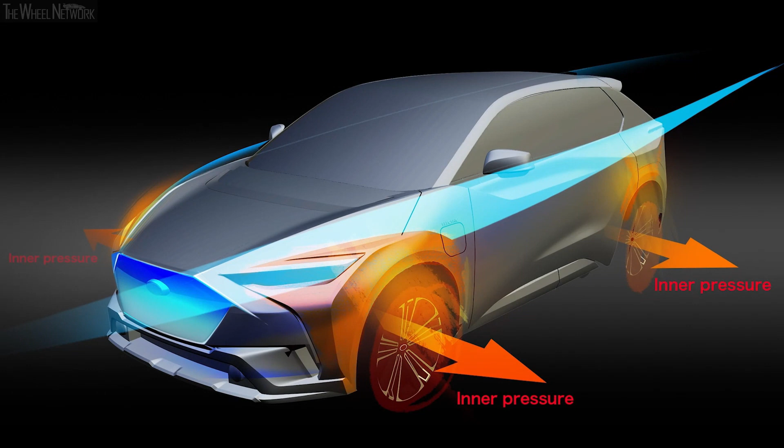These aerodynamic features all optimize airflow. They reduce disturbance and noise. When you're sitting in a car that runs without an engine, it tends to be quiet, and the last thing you want is wind noise spoiling that quietness. So these aren't simply nice-to-have design elements, they all perform very specific functions.

Inside the car, designers created an open, relaxing, uncluttered space. Meters have been raised for easy visibility, and the instrument panel has been lowered for openness. The center console connects naturally with the 12.3-inch center display. They've minimized the number of switches and tried to keep things as intuitive as possible. The Solterra comes equipped with Harman Kardon premium audio, exclusive to the Subaru version. There are other details about the interior we'll give you later. Above your head, there's a large glass roof that accentuates that feeling of spaciousness.

There's plenty of space to sit in the rear. There's no cumbersome tunnel in the middle, so there's more space for your feet and legs. We'll have a quick look at the trunk later - it's got 464 litres of loading capacity, with space for 3 large suitcases, 4 golf bags, or similarly large items. You've got hooks and rings to make sure your luggage doesn't fly around when you drive. If you've put down the rear seats, you can slide in a bike or one of those long heavy boxes from that famous furniture shop.

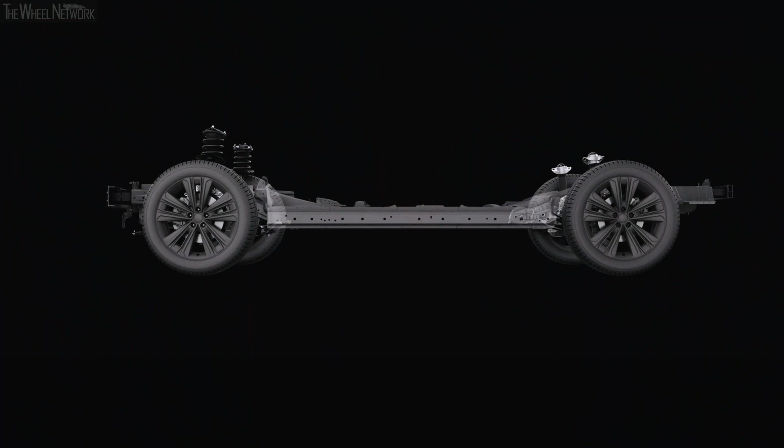Now, electrifying a Subaru to full electric means we had to address other new safety areas. Adding batteries to a car adds weight, and the heavier the car, the more damage it can cause to the vehicle it collides with. That's pure physics. Engineers factored this in when creating the Subaru e-platform that houses and protects the electric equipment and the electric powertrain.

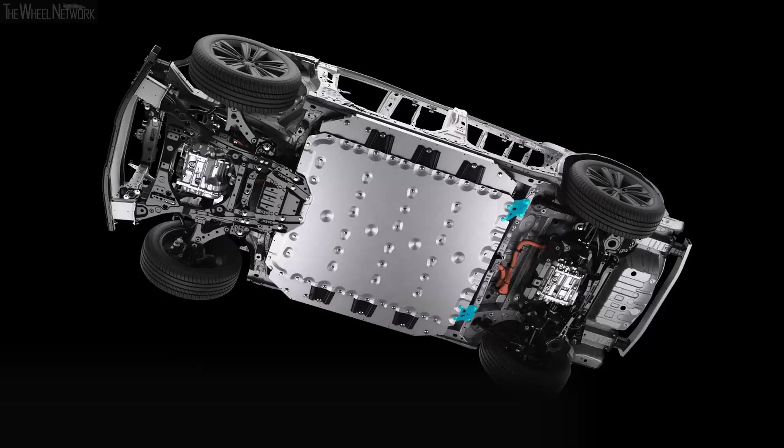They engineered it in a way that not only allows batteries to be stored safely in the underfloor, they utilize the batteries to make the framework stiffer and stronger. As a result, the Solterra rides on a platform that is 1.2 times stiffer and more rigid than the platform used on our petrol and hybrid SUVs. It had to, because the car's heavier.

In the event of a collision, the impact energy is channeled via a multi-load path that deflects it from the area where the electric components are located. Occupants are protected by a body structure with lateral rigidity that is 200% stronger than it is on our other SUVs.

The Solterra is also safe for those outside the car. It features strategic crumple zones. To put it simply, the structure is built in a way that is stiffer in places and flexible in other key areas, so that it can absorb impact energy and minimize damage to the objects it collides with.

To give you one example, the energy absorption zone in the front of the Solterra is larger than it is on other Subarus, and it is designed according to the specific shape of a human leg to limit the damage to pedestrians from the waist down to the lower leg, which is typically the first part of the body exposed during that type of accident.

Our Solterra was built to protect those sitting inside the car and those outside it, whether they drive, they cycle, or they walk. Focus was also on keeping the batteries safe.

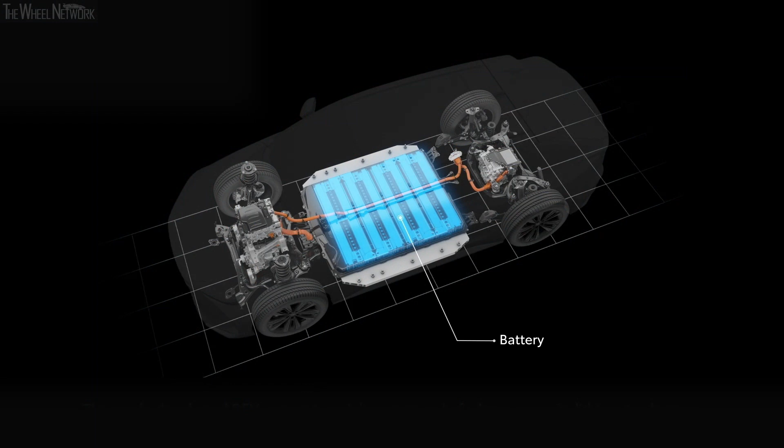Well, our Solterra might just have them tick that fun power box with a bigger smile. We think they will like the fact that the Solterra is powered by two independent 80 kilowatt electric motors, one on each axle, front and rear, to deliver an output of 160 kilowatts, 337 Newton meters of torque.

Because they associate fun with responsive power, our Subaru drivers will enjoy that quick, instant, linear acceleration. There's just more of it in the Solterra because it's electric. Subaru drivers like driving for the sake of driving, and they like the idea of owning something a little bit different.

We think they will love some of the driving functions of the Solterra, and they will like the fact that they are exclusive to the Subaru model. For example, it's got 3 different drive modes: Eco, Normal, Power. It has paddle shifts for quick, dynamic regeneration of braking energy, useful and fun when driving on smooth, winding roads or on unstable conditions. They will like the fact that the Solterra has got shock absorbers and steering settings exclusive to Subaru. They will also like other functions the Solterra shares with its twin version, like the S pedal, the one pedal drive whereby they can accelerate and brake simply by depressing and releasing the accel pedal.

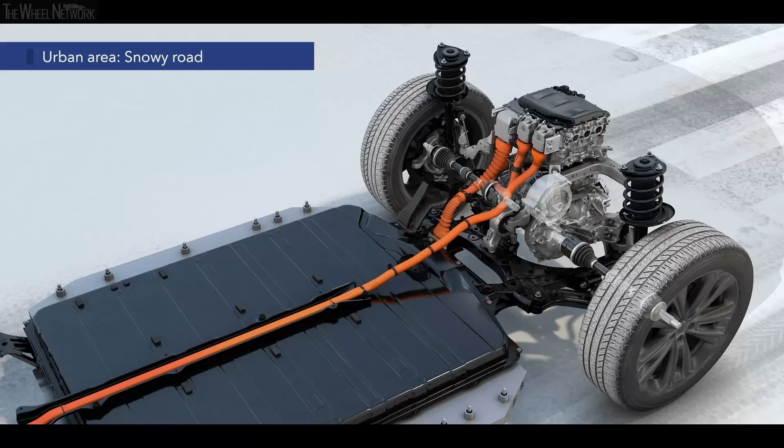Lastly, the third box our drivers say they must be able to tick is toughness. Now, tough is a word our drivers use a lot when we ask them to define what makes Subaru a Subaru. It's got to be tough enough to challenge the toughest of roads in any weather condition, and durable enough to resist the test of time.

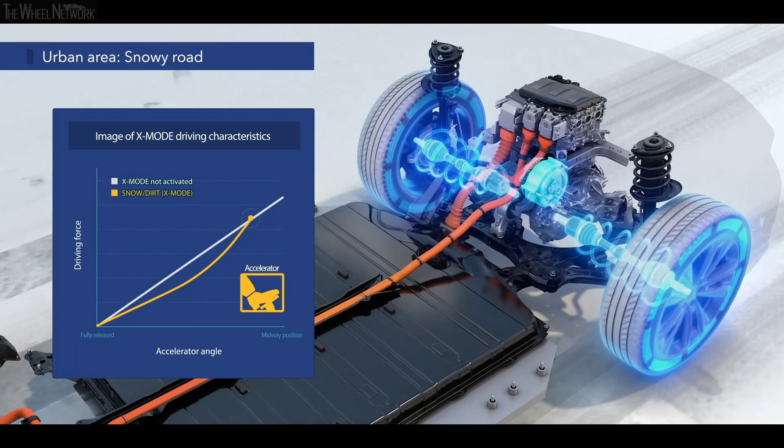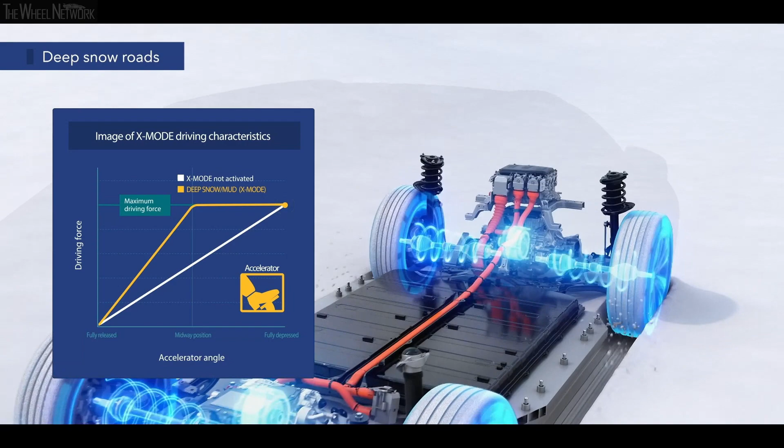Now, challenging the elements with confidence and peace of mind is what we think any true SUV should do. As is the case with our Outback, our Forester, and our XV, our Subaru Solterra was engineered to function as a true SUV, not just to look like one. Ask Subaru engineers to describe what makes our Solterra a true SUV, and you'll get the same answer.

It's a true Subaru because it has got our Subaru all-wheel drive. Our customers want all-wheel drive. They also got used to our symmetrical all-wheel drive technology, and they understand the benefits of a permanent all-wheel drive system. On the Subaru version specifically, the all-wheel drive system is a permanent one, with both front and rear motors engaging the 4 wheels permanently and immediately as the car starts moving. Our Solterra will launch in Europe fitted with that permanent all-wheel drive system as the only standard offering.

It also comes with an upgraded version of our X-Mode system. With X-Mode, you don't have to be an off-road expert. You just press a button and you can start navigating easily through stretches of deep mud or snow. You'll drive up a steep, slippery slope without the risk of sliding off it. And you'll drive down steep inclines without having to touch neither the accelerator nor the brake pedal. You'll just keep your hands on the steering wheel and let the car handle the tricky part for you.

Now, Solterra's got that, like other Subaru SUVs. But it adds a new grip control function to it. You see, it's taking full advantage of the ideal power distribution of its two independent motors to increase grip control. It's got a lower center of gravity height than, say, our Forester, but it retains comfortable ground clearance.

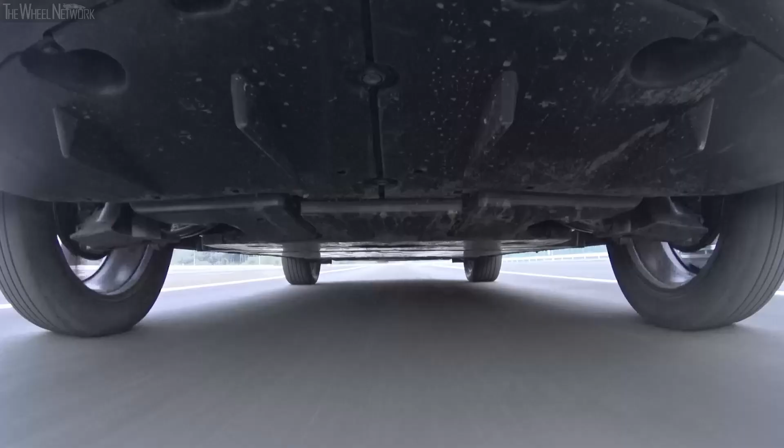As regards the actual cruising range, and as it is the case with conventional engines, power consumption is affected by a number of factors. Any cruising value you're given for a full tank or a full charge means very little if you ignore these factors. How much power you need depends on how you use that power and what you use it for. Take heating and cooling, for example. It can drain a lot of power. In the Solterra, energy loss is minimized as it uses a heat pump for direct heating to the driver, seat heating, steering wheel heating and so on. The system makes it less likely for temperature differences outside the car to affect the temperature inside the car. The energy you can save on heating is energy you can save for driving further.

Now, the Solterra's cruising distance shouldn't be too far from the 400-kilometer mark on one single charge. We'll, of course, be waiting for all these values to be homologated. But just for your reference, Forester owners have told us that they drive a daily average of about 50 kilometers. That's their daily average, it's an average figure. Some will drive more, some will drive less, of course. But we think that the cruising distance we offer is competitive.

And most importantly, it meets our drivers' needs and expectations. They will be able to control many of the car's values, including the battery charge level, the remaining cruising distance available, etc., with total peace of mind, and do so remotely through a Subaru Care app they will download on their smartphones. Our customers will be able to charge to 80% capacity in 30 minutes on a quick charger, or simply plug in a regular socket overnight, sleep on both ears, and wake up in the morning to a fully charged, safe, fun, and tough 100% true Subaru.